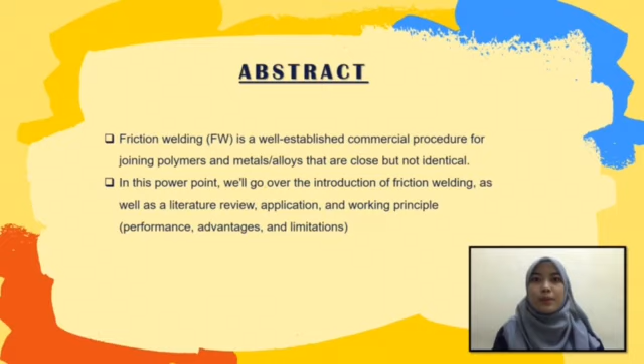In this PowerPoint, we will go over the introduction of friction welding as well as a literature review, application and working principle, which is performance, advantage and limitation. Welding is one of the most frequently used joining techniques, with both classic and non-traditional processes used in almost every industry. Solid-state welding, fusion welding, and solid-liquid welding are the 3 basic types of welding mechanisms.

In this slide, I will explain the introduction of friction welding. Friction welding is a type of solid-state welding method in which heat is generated by mechanical friction between a moving workpiece and a stationary component, with the addition of a lateral force called upset to plastically displace and fuse the material. Friction welding is a forging technique rather than a welding procedure in the classic sense.

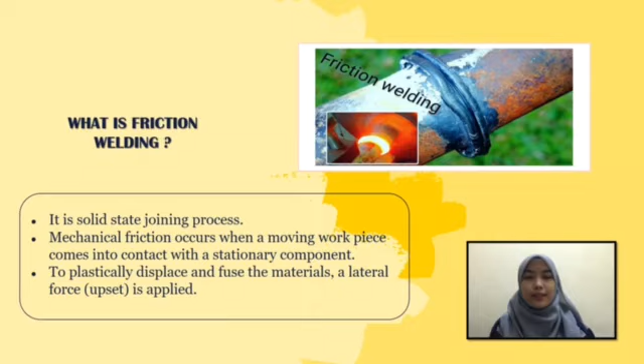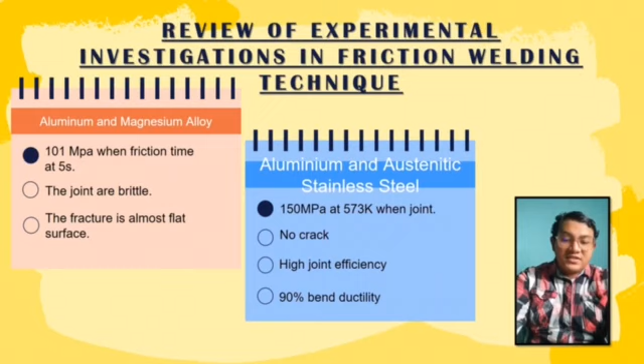Next is aluminum and austenitic stainless steel, with 150 megapascal at 573 Kelvin when joined, no crack, high joint efficiency, and 90% bend ductility. Next, we can see titanium alloy and stainless steel, with speed from 400 to 1800 RPM. Joint strength is 468 megapascal and joint efficiency is 90%.

Next is magnesium and titanium, with a steep hardness gradient from titanium to magnesium, forming a continuous intermetallic layer with magnesium and titanium. From critical analysis, the deformation process is mapped.

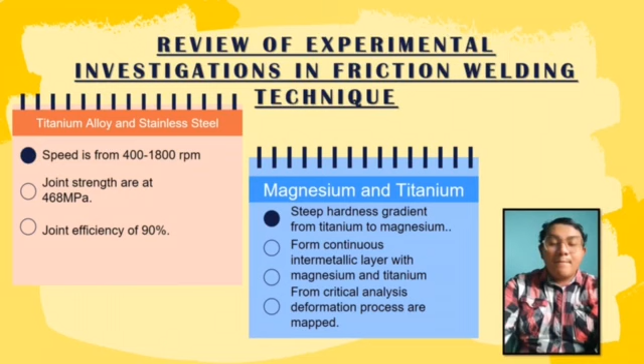The second part of the literature review is What is Friction Welding, Principle and Types of Friction Welding by Anup Kumar Dey. In this slide, I will present steps in friction welding. Step 1. One part to be welded is placed in a rotor driven chuck and the other part is held stationary. Now the rotor is switched on to rotate at very high speed along with the workpiece. Step 2. The rubbing of welding surfaces creates sufficient heat of the order of 900 until 1300 Celsius for steel. Now a high pressure is applied through the stationary part.

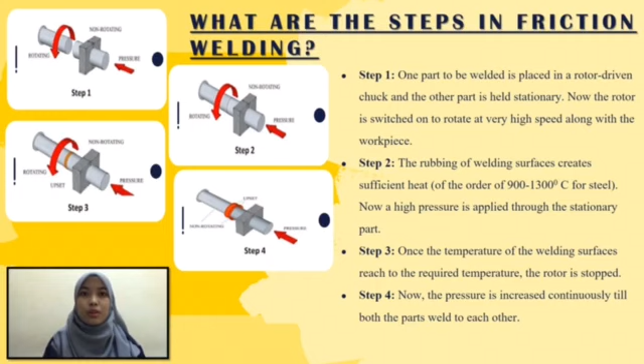Step 3. Once the temperature of the welding surface reaches the required temperature, the rotor is stopped. Step 4. Now the pressure is increased continuously till both the parts weld to each other.

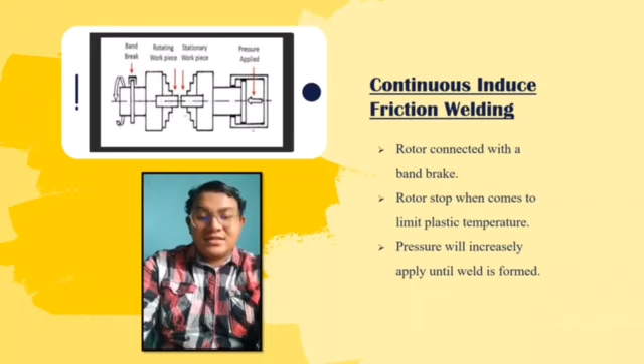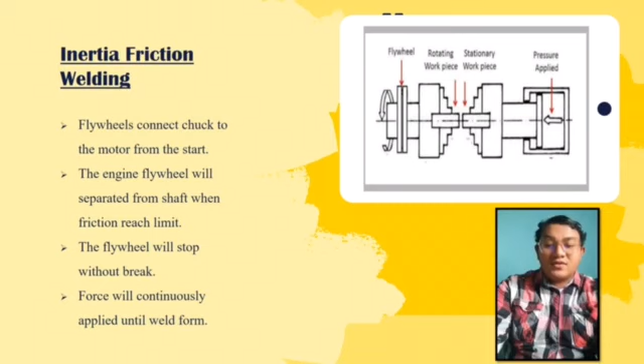The second one is inertia friction welding. A flywheel connects the chucks to the motor from the start. The engine flywheel will separate from the shaft when friction reaches its limit. The flywheel will stop without a brake. Force will continuously apply until the weld forms.

The last part of the literature review is from Friction Welding, Everything You Need to Know by Pierce Industry. In this research, they tell us there are four types of friction welding. The first one is direct drive friction welding, in which the spindle drive motor is attached to the spindle shaft permanently and rotates. The spindle slows, and the welding processing stops at a predetermined point.

The second one is linear friction welding. The chuck is oscillated in lateral motion. Only workpieces that have high shear strength, and it can join parts of any shape. The third one is friction stir welding, FSW, which is a solid state joining process using non-consumable tools. It softens the material of two-piece metal, used in modern shipbuilding, train, and aerospace.

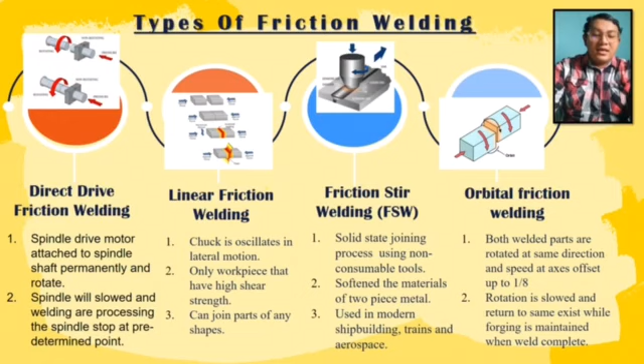The last one is orbital friction welding, in which both welded parts are rotated in the same direction and speed at an axis offset up to 1/8. Rotation is slowed and returned to the same axis, while forging is maintained when the weld is complete.

Okay, next is application for friction welding. First, it is used in electrical industries for welding copper and aluminium equipment. Second, friction welding can be used to build better industrial rollers, tubes, and shafts. Third, friction welding is used in automotive parts like engine valves and shock absorbers.

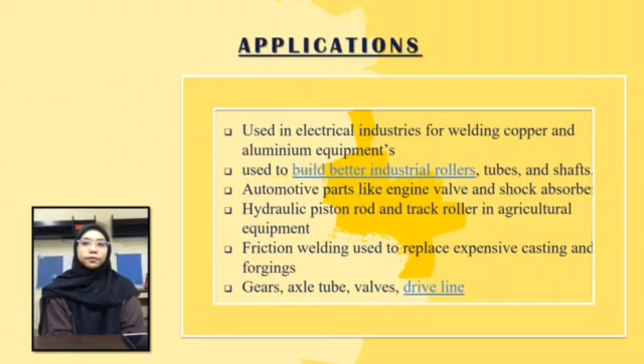Fourth, hydraulic piston rods and track rollers in agricultural equipment are also joined by friction welding. And next, friction welded assemblies are often used to replace expensive castings and forgings. And lastly, gears, axle tubes, valves, and drivelines are also welded using friction welding.

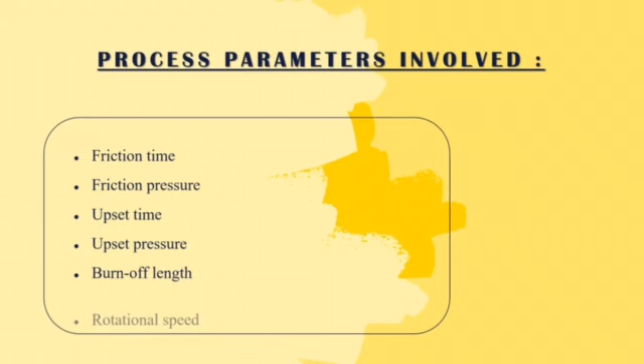The next is the effect of parameters involved. So first, for friction time, from the research, we can say that increasing friction time will increase the tensile strength of the joint. The type of intermetallic compound was variable with increasing friction time, which means a longer friction time can cause the excess formation of an intermetallic layer. However, some of the welds show poor strength depending on some accumulation of alloying elements at the interface.

Second is friction pressure. So we can say that when the friction pressure increases, the thickness of the intermetallic compound layer at the interface decreases as a result of more mass discarded from the welding interface. The heavy thickness of the intermetallic compound layer can seriously worsen the mechanical properties of the joint. So, the formation of microcracks could be controlled effectively under this higher friction pressure.

Third is upset time. So, the strength of the joint varied with increasing upset pressure and upset time, which means the joint strength increases and then gradually decreases after reaching a maximum value with increasing upset pressure and upset time. The joint strength depended on the size and shape of the tensile test pieces. So, the longer upset time causes the formation of an intermetallic reaction layer at the weld interface, and the reaction layer grows as the upset time increases.

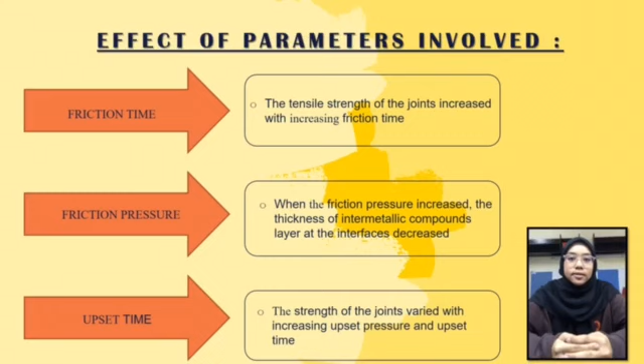Okay, next is upset pressure. It was stated that when the upset pressure increases, the tensile strength of the joint also increases. So we can say that as upset pressure decreases, the toughness also decreases.

So next is burn-off length. So the quality and the strength of the bond produced also vary, which means a higher burn-off length with low upset pressure decreases the impact toughness of the friction welded joint, whereas low burn-off and high upset pressure will result in increased toughness of the welded joint. Furthermore, the shrinkage of the specimen also increases when the burn-off length increases.

So next is rotational speed. So the experimental results show that a higher speed had a significant effect on the structure of the joint, and also it improved the microhardness and bending strength. It was found that the fracture proceeded mainly through the cleavage plane at a low speed, while the fracture occurred through dimples at a high speed.

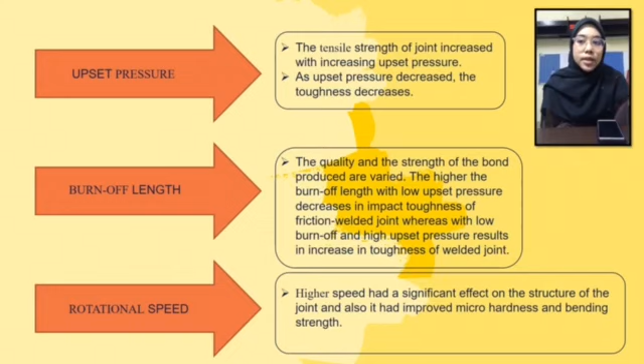So the joint strength increases and then decreases after reaching a maximum value with increasing rotating speed. So we can conclude that the tensile strength and impact toughness increase with increases in rotational speed and then decrease constantly.

Now we will talk about friction welding durability. Friction welding not only turns out strong welds, it also turns out welds that remain strong. This is especially crucial in the kinds of high-performance environments that friction welded components are subjected to in post-production operation. The durability of friction welding is one of the reasons it is so prevalent in marine, air, and space industries. Friction welding also produces strong, consistent joints by utilizing tubes, bars, and plates.

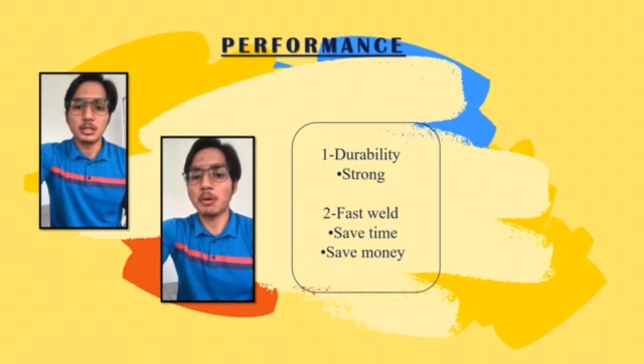It allows you to design complex parts that may otherwise be cost prohibitive to create. A large diameter cylinder rod could take 20 to 30 minutes to weld using the standard way. With friction welding, this could be a 5 to 7 minute weld. Faster cycle time means more parts welded in less time. This is definitely saving cost.

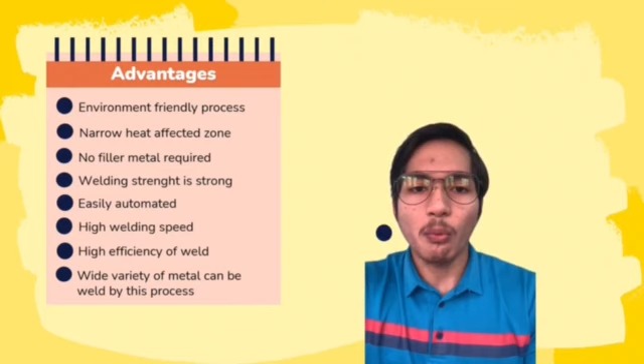Okay, now we will discuss the advantages of friction welding. So the first advantage is it is an environmentally friendly process without generating smoke. Second advantage is a narrow heat affected zone, so no change in properties of heat sensitive material. Third advantage is no filler metal required. Fourth is welding strength is strong in most cases. Fifth is it is easily automated. Sixth is high welding speed, and last but not least, high efficiency of weld. And lastly, a wide variety of metals can be welded by this process.

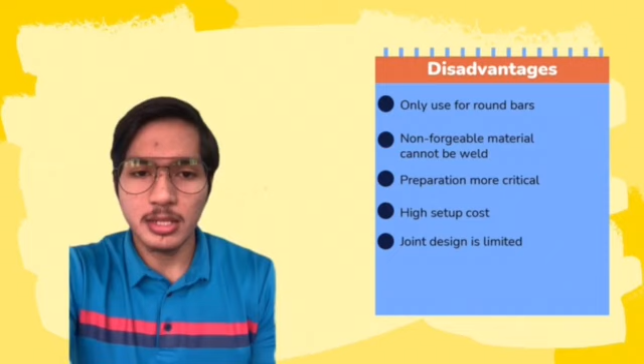Okay, now we will talk about the disadvantages of friction welding. The first disadvantage is this is mostly used only for round bars of the same cross section. Secondly, non-forgeable material cannot be welded. Thirdly, preparation of the workpiece is more critical. Fourth is high setup cost. Fifth is joint design is limited.